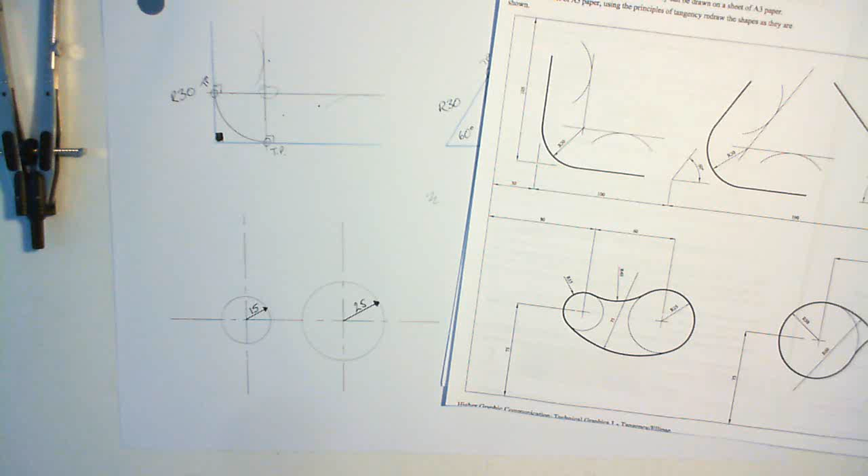For this next one, we're going to look at these two circles, which are these two circles here. And we're going to join them with, again, two curves which just create tangent points here and just create tangent points here. Same with the bottom. It looks a little bit like a small pulley wheel and a big pulley wheel with a belt going in between. The radius of this bottom curve, you can't see it very well on here, but it's 75 millimeters.

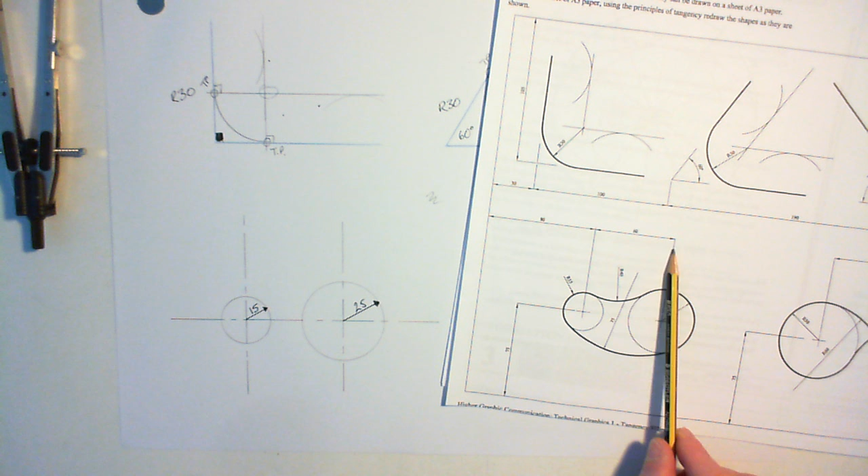The radius of the small, slightly less deep belt on the top is 40 millimeters. So what do I know about these two circles? Well, the only thing that I know about them are the radius is 15 on this one, and on this one the radius is 25. The other key point I know is where the centres are. The centres are fixed. On here it tells me, again, it's very difficult to see on the camera, but it's 60 millimeters between these centres, and they're horizontal.

So how does that help me? Well, I've got a fixed point here and a fixed point here, which is this one and this one. If I deal with this little belt at the top first of all, that's got a radius of 40. Now the curve comes round and just touches this circle here with a radius of 40. That means that the centre of the bigger circle that's going round there must be 40 millimeters away from here. 40 millimeters up here somewhere.

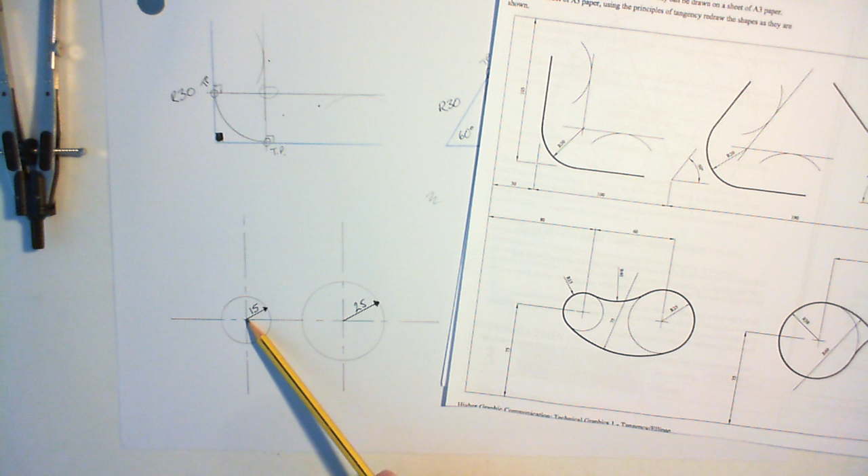Now I know the radius from the edge of this circle to that centre is 15. So if I add the two of them together, I'll get a total of 55. So I know that the centre I'm looking for up here is going to be 40 plus 15 away from its centre point. So what I can do is set my compass to 55, and I'm going to do that now. Be really careful with this because even the slightest little error can make a difference. So it's set to 55, put the centre of my compass here, that's a fixed point, and I'm just going to draw a bit of an arc.

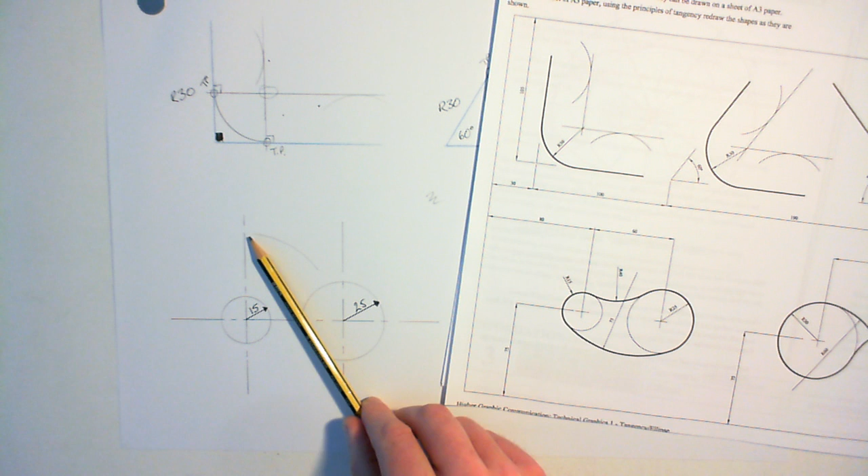Now somewhere along that arc, the centre point of my compass is going to be placed in order to draw the curve which is coming round and joining these two circles here. But I don't know whereabouts it is. I know the radius is going to be 40, but I don't know where I'm going to place the compass point.

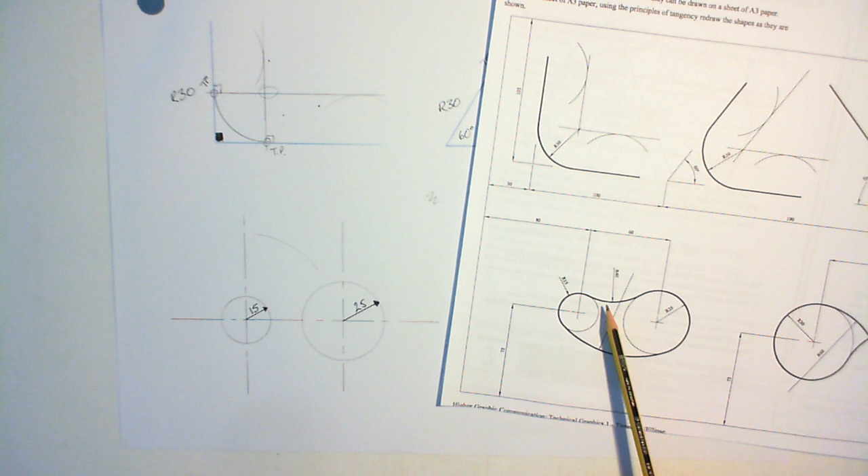In order to find that, I'm going to look at this circle, and I'm going to use the same thinking on this one. This curve is coming round and it's just touching the edge of the circle and it's going off into the distance somewhere, the same way that this was. So that bigger circle there, which we can't see, has got a centre point up here somewhere. The centre point is going to be 40 away from the edge of this circle, up in this direction somewhere. So it's going to be 40 up there somewhere, but I don't know whereabouts it is.

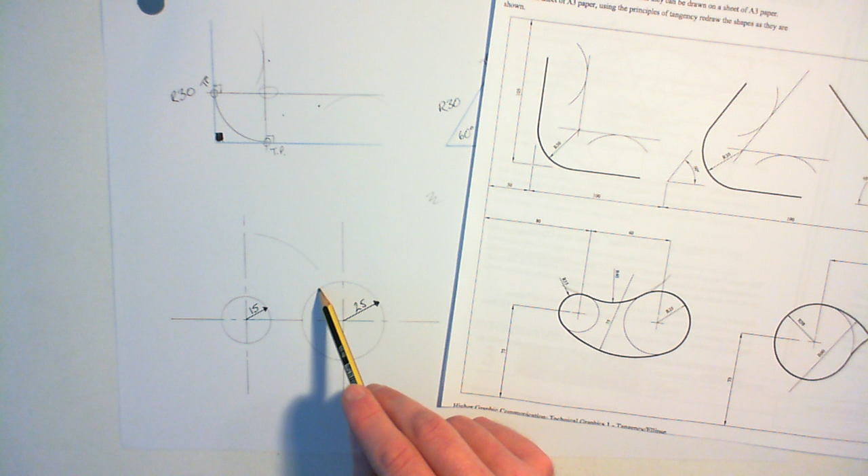But I do know the centre of this one. It's 25 from there to there, and if I add on the 40, it makes a total of 65. So as before, I'm going to set my compass. I'm going to be really careful, set it to 65 this time, because it's 25 plus 40. Put my compass point in that fixed point that I know about, and draw another arc.

Now where those two cross over is where I'm going to put the point of my compass in order to draw this top tangent curve. I have to remember to set my compass now to 40. So I'll go back, reset my compass once again, really carefully to 40 millimeters,

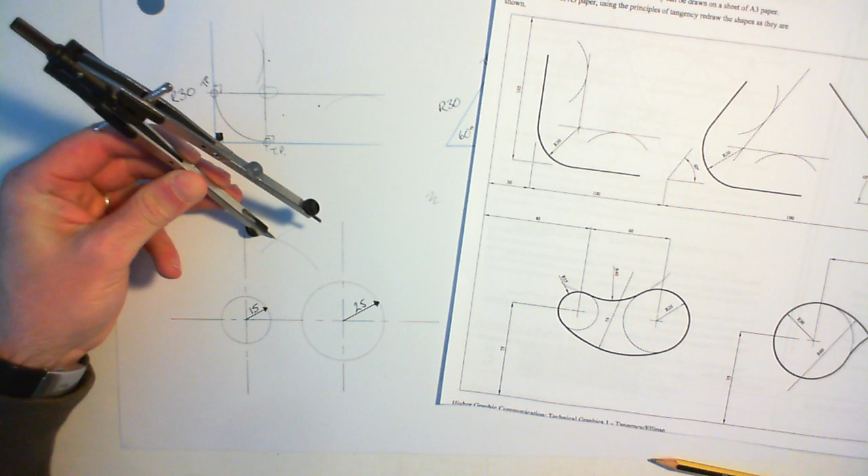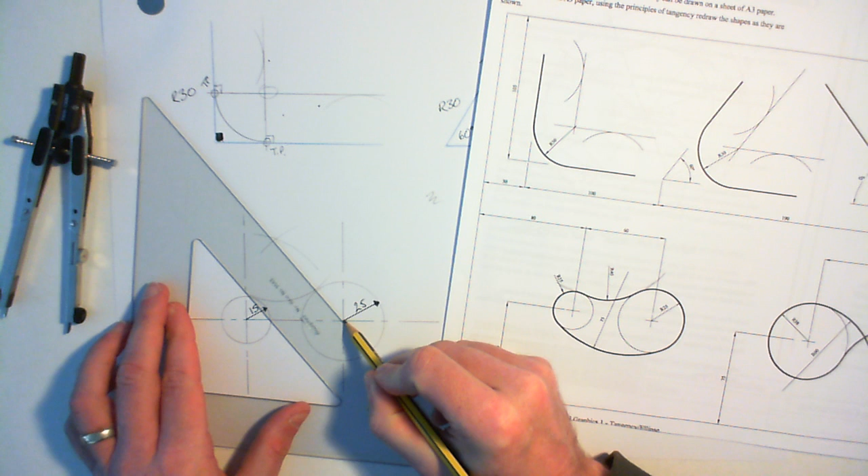and then I'm going to put my compass point on here, and trying not to get my hands in the way too much, I'm going to draw my curve there. Now, somewhere along here I've got a tangent point, and somewhere on there I've got a tangent point. How I find them is, I take a straight edge, and I line up that fixed centre, and I line up where I put my compass point, draw a line between the two of them. That then gives me

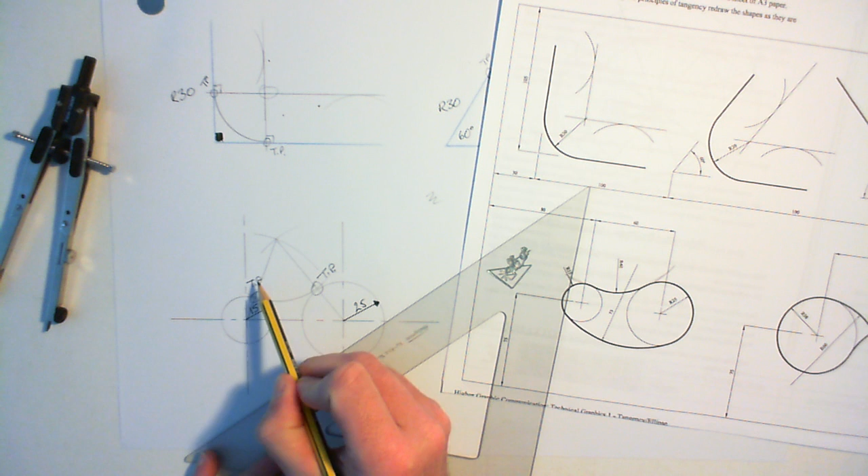TP. I do the same going the other way, so I take my straight edge, I line up where I put my compass point, and I line up the centre of the fixed circle. Draw a line between them, that gives me TP.

So what I did with this one is I added on the small radii here, and then I added them to the radius that had been given for the tangent curve. So in this case, that point there is 65 away from the compass point, and this one is 55. I'm now going to do the bottom. It's a similar way of thinking, but you just have to think about it in a different way.

Once again, here are my two fixed points, and I know that this curve here is going to have a point where the compass is going to go up here somewhere. This point here on this curve is 75 away from the centre where the compass goes. This point around here is 75 away from the point where the compass goes. But I don't know exactly where to put my compass point. But I can use these fixed points again.

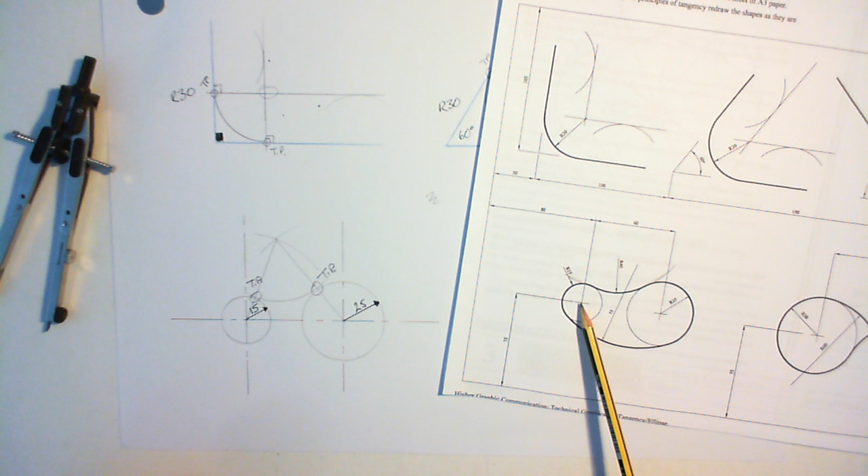This point is 25 millimeters closer. This point is 15 millimeters closer. I know that radius is 75, so for this one here I'm going to take off 15, because I know this point is 60 away from the area that I'm looking for. So I set my compass to 60, really carefully set it to 60, put the point in that known position there,

and I draw another arc. I'm ignoring these ones now. These were for the previous curve. This is a new one. This point here is 25 millimeters closer than the outside edge. So again, my radius is 75. Take away 25, leaves 50. Set my compass once again, really carefully, 50 millimeters. Put the point in this known position.

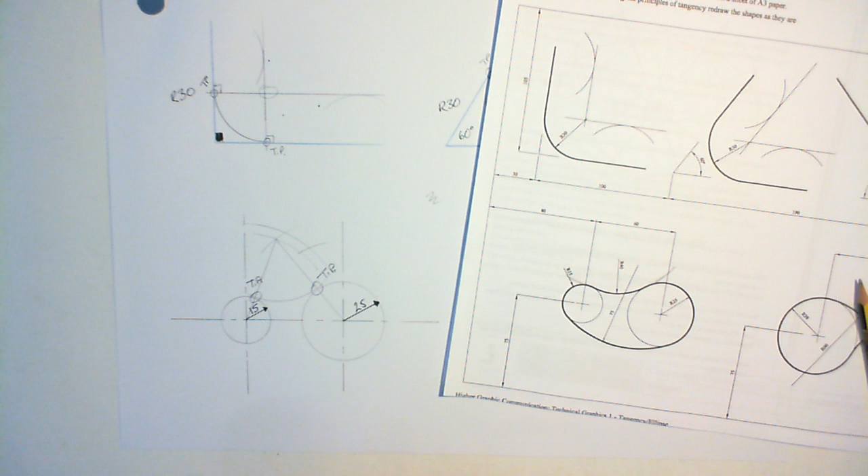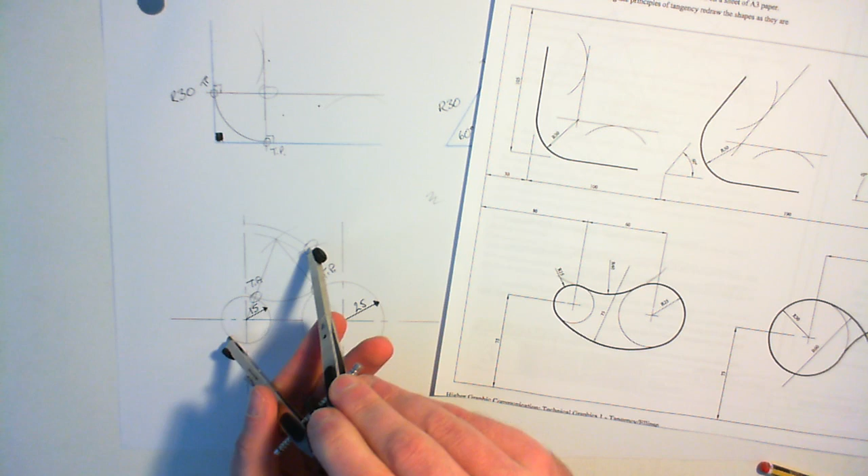Draw an arc. There is where my compass point is going to go. I reset my compass to 75 because that's the radius of that curve. 75 millimeters, and again, without trying to cover over the drawing too much, I'm going to put my compass point there, and the compass has slipped. Put my compass point there and draw my arc.

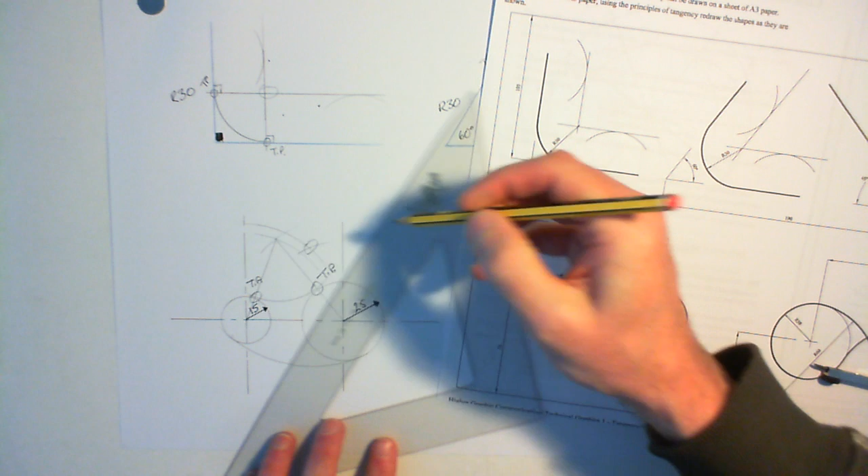Somewhere along here I've got a tangent point, and somewhere along here I've got a tangent point. What I have to do is use my straight edge again, line up this centre with that centre, that will give me the tangent point for here, then line up this centre with that centre, that will give me the tangent point there. So there's tangent point, and lining up the centres, tangent point there. So I've now got a picture the same as this one here.

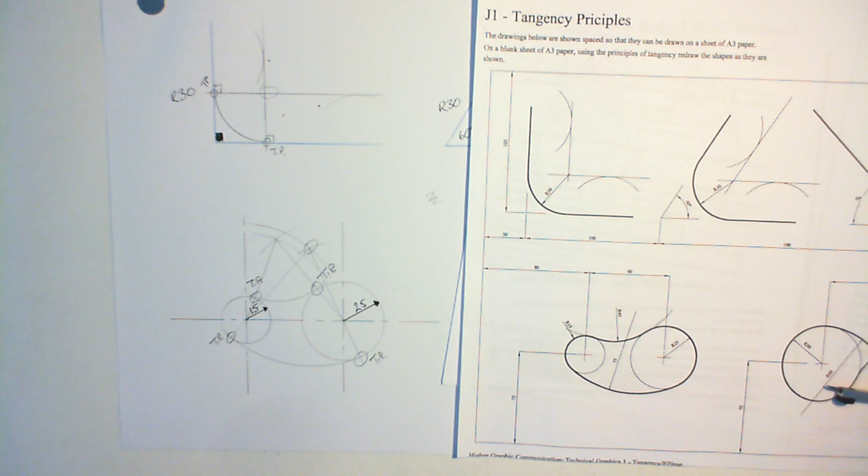Now, your task is to look at this, which is these two circles here, and this time we're going to use a combination of taking away a radius and adding on a radius, because this one goes that way and then it goes to the outside. So you're going to use the skills that you just learned on the previous example, and you're going to apply them to solving this one here.